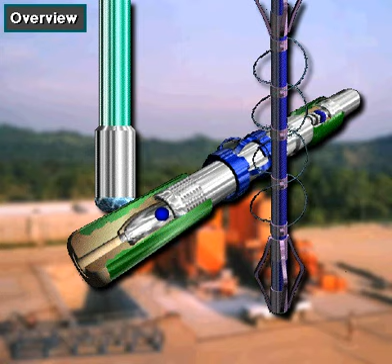Because the crew will cement the casing string in place, they also have to install some special devices on the string, which come into play during the cementing operation.

The guide shoe is a heavy steel and concrete fitting that the crew makes up on the end of the first casing joint to go in the hole. It guides the casing past rough spots and ledges in the wellbore. It also has an opening in the end. Drilling mud enters this opening when the crew runs the casing into the wellbore. Later, cement will come out of this opening on its way into the annulus.

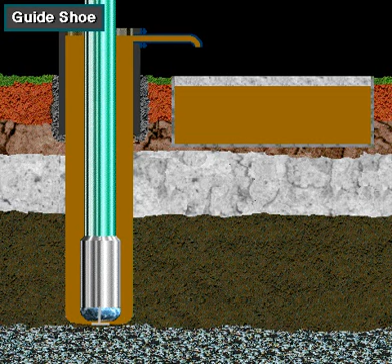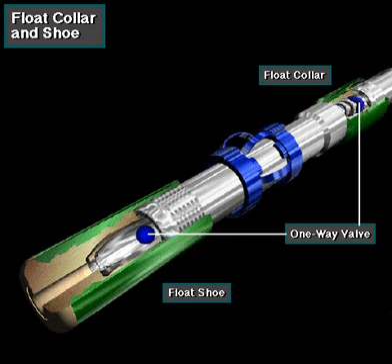Usually, the crew installs a float collar in the second or third casing joint run into the wellbore. Or sometimes they install a float shoe. Whether a float shoe or a float collar is used, each has a one-way valve in it. Fluids can flow downward through the valve, but cannot flow upward past the valve. The float collar or float shoe keeps drilling mud from entering the casing string as the crew runs it into the hole.

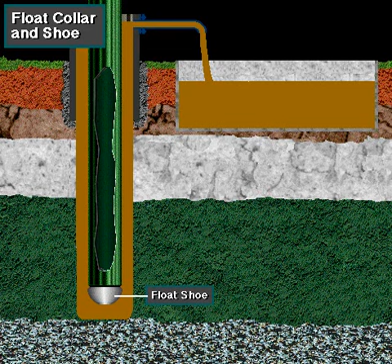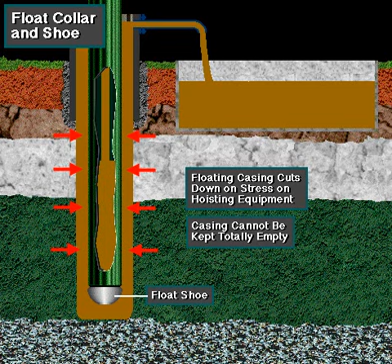Keeping the casing empty of mud allows the casing to partially float in the mud, that is, in the annulus, just as a hollow steel boat floats on water. Letting the casing float cuts down on stress and fatigue on the hoisting equipment. But the crew cannot keep the casing totally empty of mud. If they did, the hydrostatic pressure of the mud in the annulus could crush the casing. So from time to time, the crew puts mud into the inside of the casing from the surface to offset hydrostatic pressure.

The float valve also holds the cement in place once it is displaced into the annulus. Otherwise, it would U-tube back into the casing.

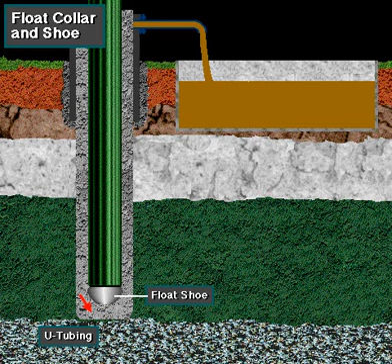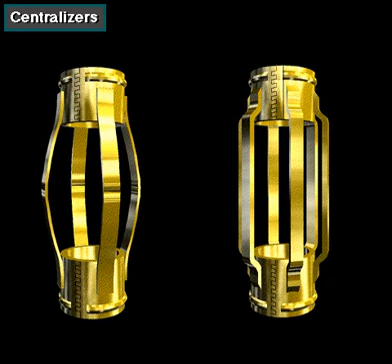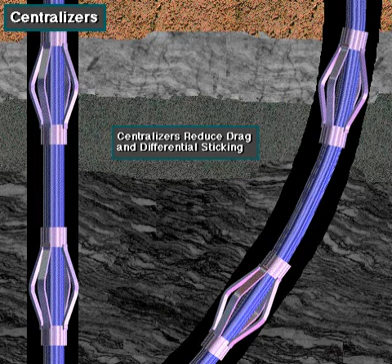On various joints of casing, crew members also install centralizers. Centralizers keep the casing from leaning against the side of the hole. In other words, centralizers keep an opening between the outside wall of the casing and the wall of the hole. Centralizers reduce drag and differential sticking while running the casing. Drag is resistance to motion caused by the casing contacting the wellbore.

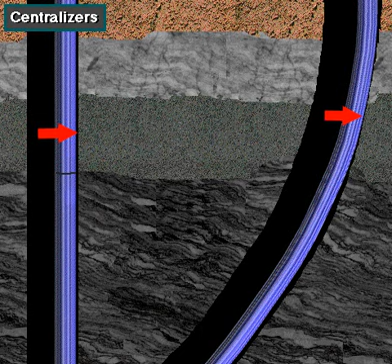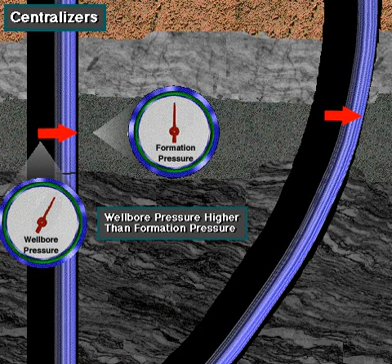Differential sticking happens when the casing contacts a permeable formation in the wellbore, and the pressure in the hole is greater than the pressure in the formation. The higher hole pressure tends to hold the casing in contact against the area of lower formation pressure. Keeping the casing off the wall of the hole also ensures that cement will surround the outside of the casing and bond it securely to the hole.

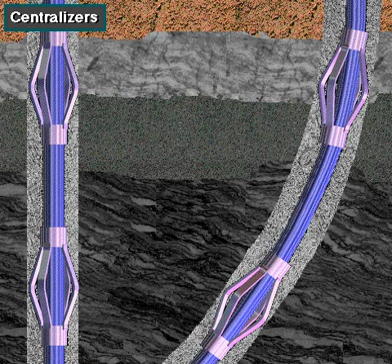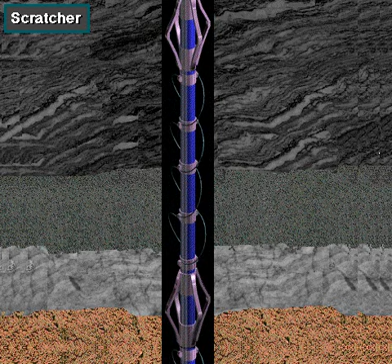Another device that helps ensure a good bond of cement to the hole is a scratcher. Depending on the wellbore's characteristics, crew members install several on the casing string. Just before they pump the cement into the casing and hole, they rotate the casing string or move it up and down, that is, reciprocate it, depending on the type of scratchers they install.

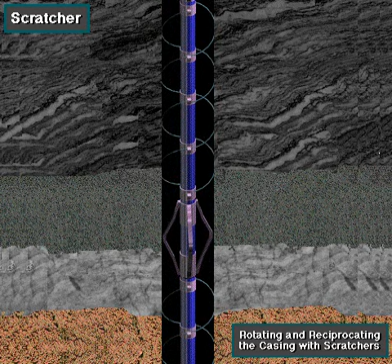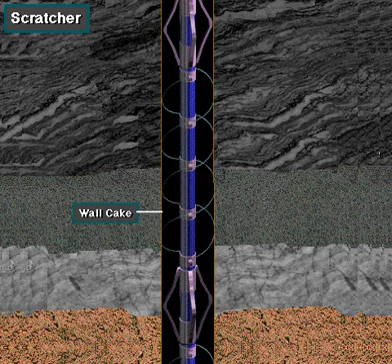In either case, the scratchers remove wall cake left by the drilling mud during drilling. Removing the wall cake, solid particles in the mud that stick to the wall of the hole, helps the cement bond better to the hole.